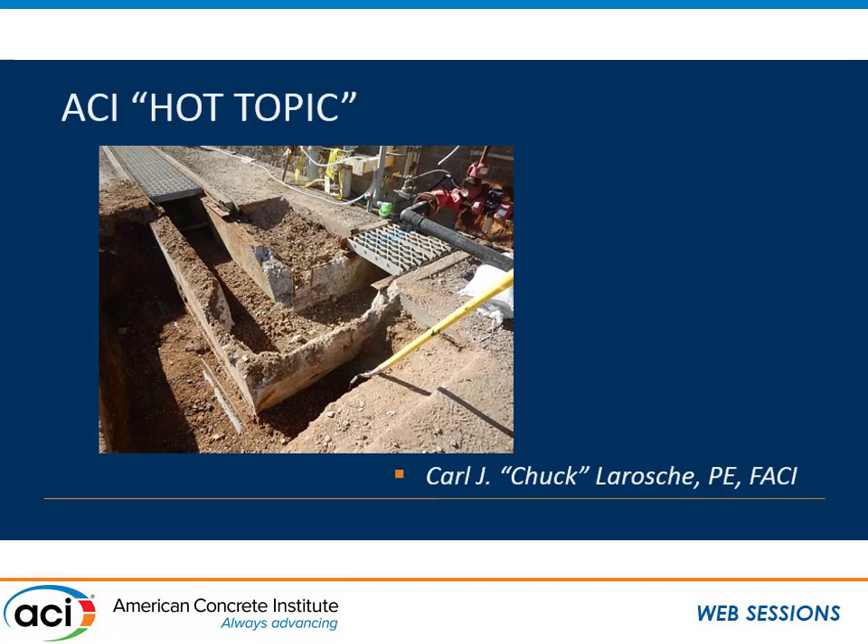All right, the hot topic, first out of the chute. Is it all on the contractors? I was kind of thinking more contractors would be here tonight, so hopefully we have a few. The failure of concrete repairs. So who are these guys presenting to you tonight, and who are they to judge the contractor?

But what I'd like to present to you, in all seriousness, is that one of the repair code's objectives is to create a level playing field. And in that way, we, the Institute, are going to improve contracting, and repair contractors are going to get a fair shake here. That's really what I wanted to talk to you about tonight.

I'm worried about little Dilbert. He's not like other kids. What do you mean? Yesterday I left him alone for a minute, and he disassembled the TV, our clock, and the stereo. That's perfectly normal, kids take things apart. Oh, the part that worries me is he used the components to build a ham radio set. Oh dear, is that bad? Normally I'd want to run an EEG on him, but the machine isn't working. It's worse than I feared. What is it? I'm afraid your son has the knack. The knack? It's a rare condition characterized by an extreme intuition about all things mechanical and electrical, and utter social ineptitude. Can he lead a normal life? No, he'll be an engineer.

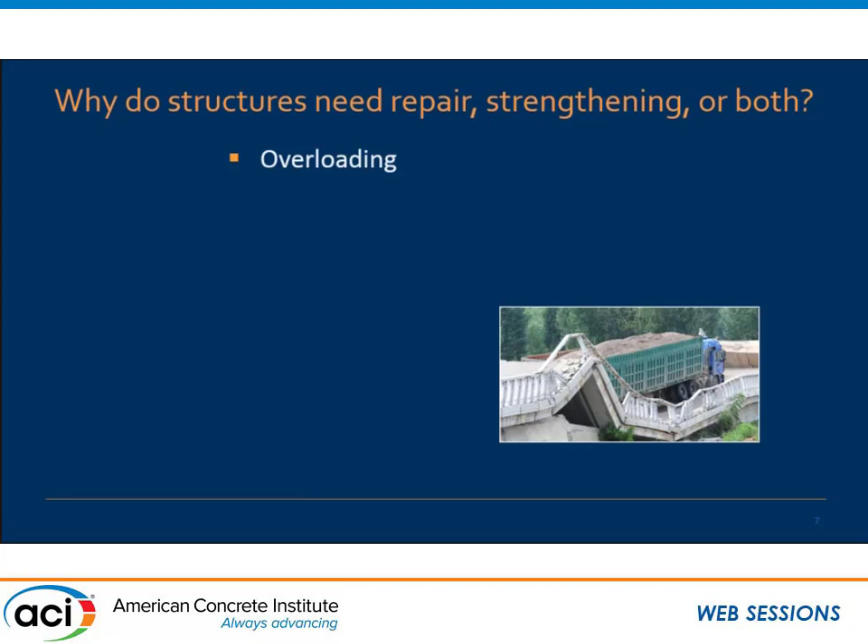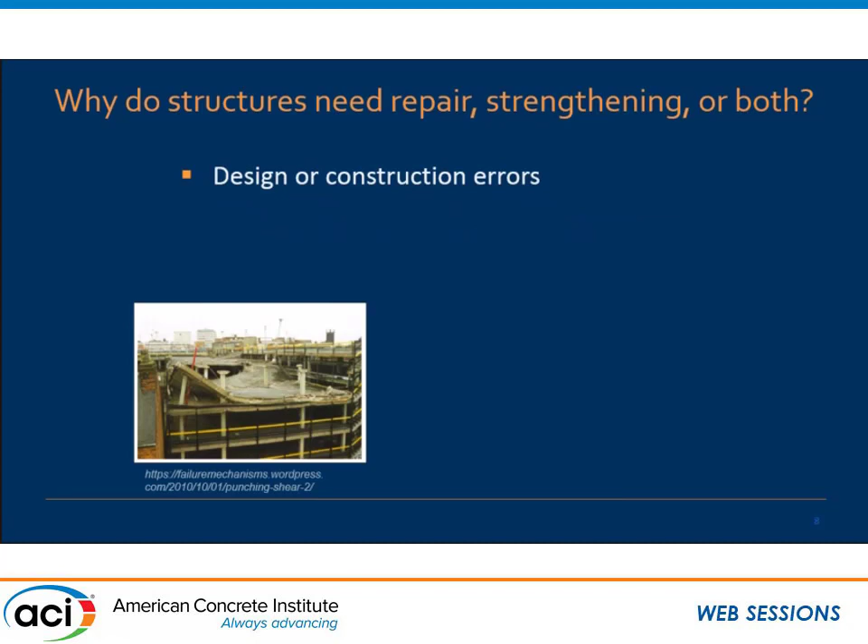Well, we've got overloading, deterioration, use of inappropriate materials, design or construction errors, undergoing expansion, accidental effects, environmental factors. But how big is it? That's 18 to 21 with a B - 18 to 21 billion. Kind of hard to wrap your head around that.

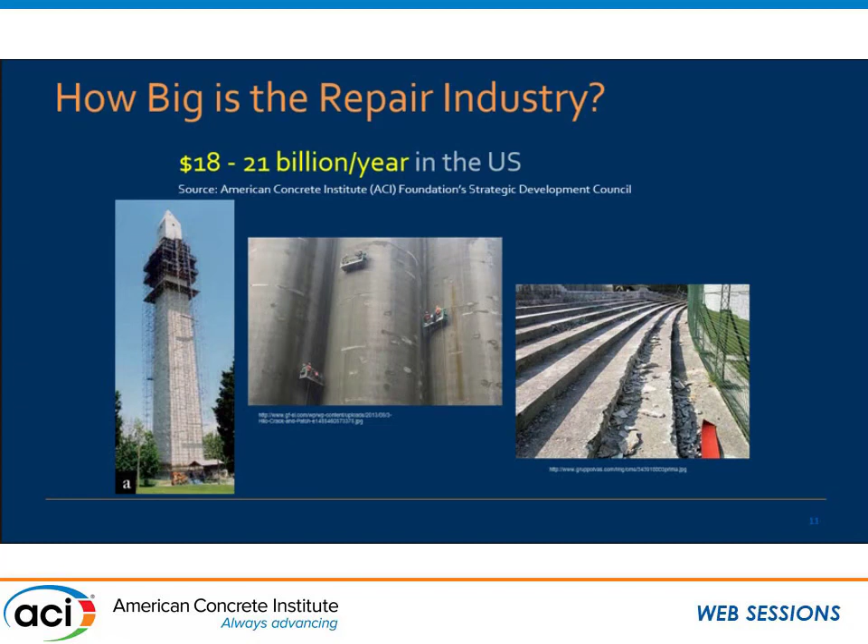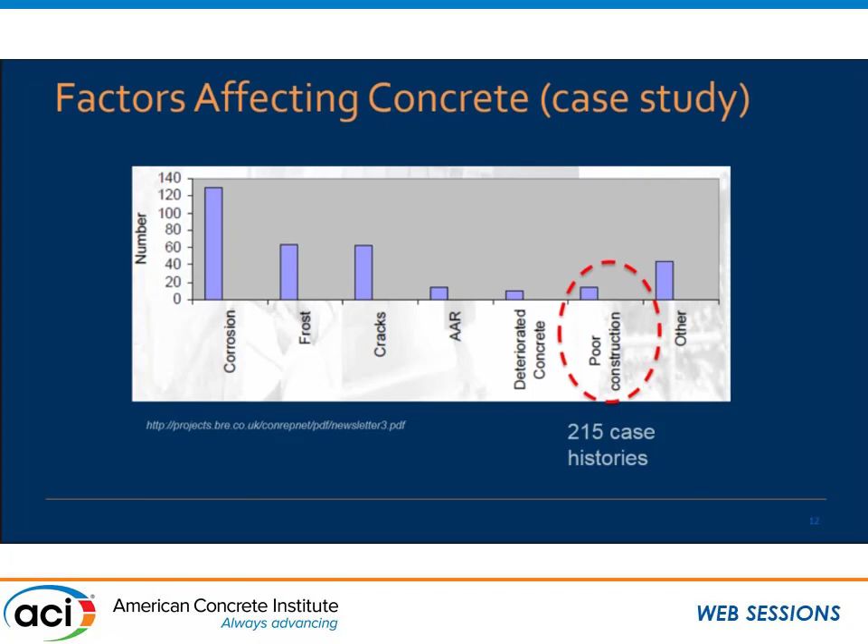But now we have these factors that affect concrete and also affect our repair. And we'll just take a closer look at construction, repair methodologies. But this is the issue, right?

0 to 5 years, 20% fail. I get to 11 to 25. Not exactly a track record for sustainability, right?

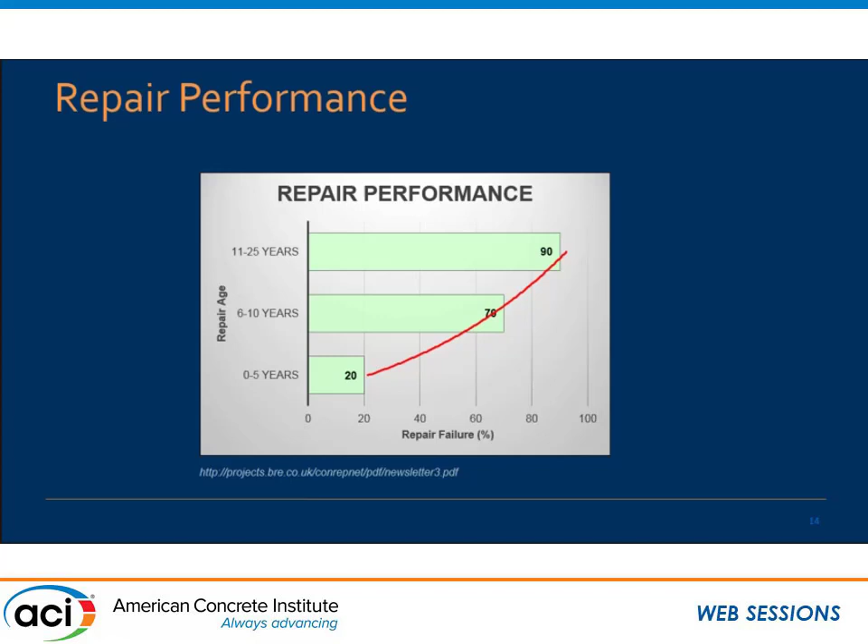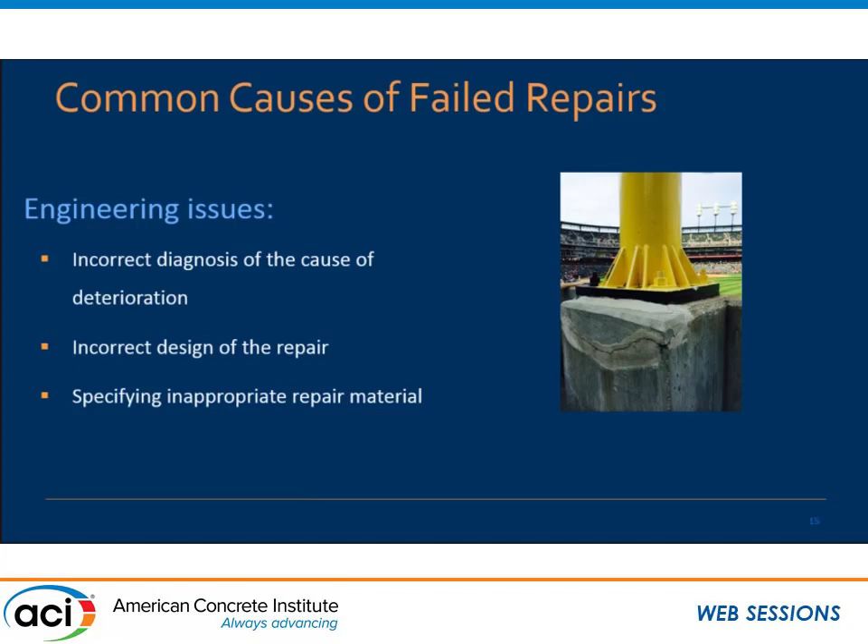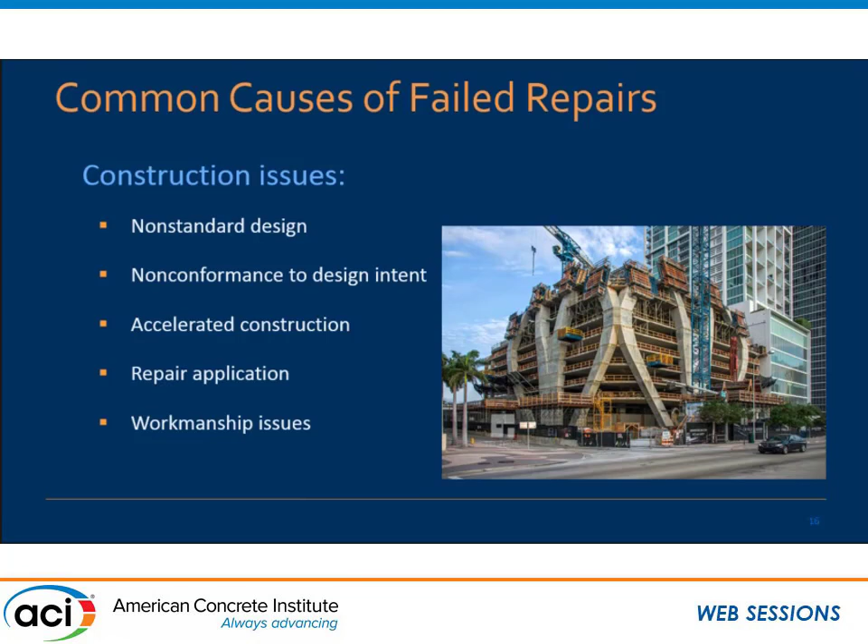So now I'm going to zoom in a little bit on workmanship issues and material quality. So is it really the contractor? Can we as an industry change the repair quality? That's kind of what we're trying to do, right? That's why we're here, that's why we have a hot topic tonight. Can we set the minimum standard that creates a level playing field? And if so, will the cream rise to the top?

So in trying to prepare for all this and having to compete with Dr. Marcotte, I had to stretch myself a little bit, and so I wanted to present two exact repairs designed by the same engineering firm, but with two completely different contractors, and I wanted to step back and look at it.

And the first one here is moving day. Now, I came across this project - how many of you have moved with your significant other? It's not a good experience, right? It's even worse when this happens.

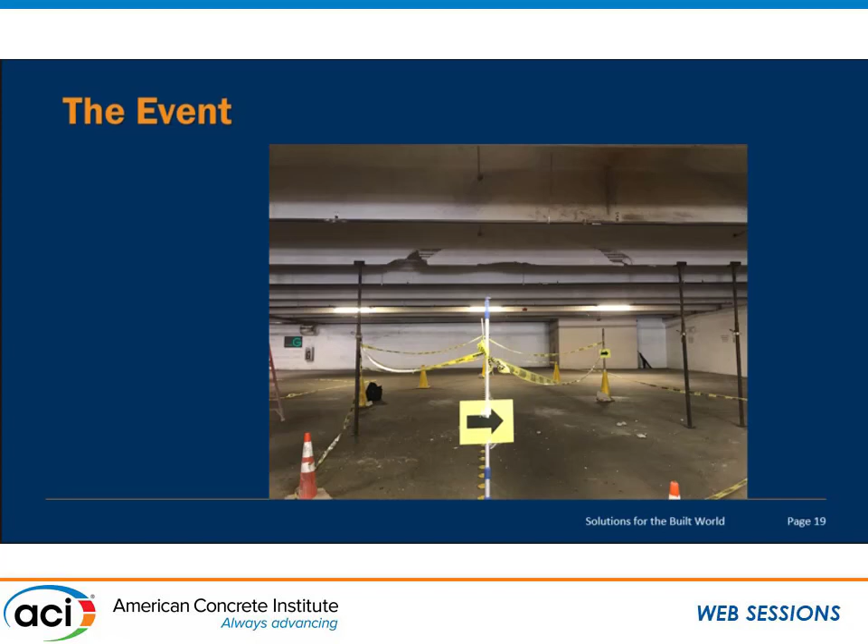And so I came upon this couple, and right as she was asking him if he certainly got the insurance, right? That would be a no. So this is my precast double T right after the event. And pretty easy to assess, right? Yep, you smacked it good. We're looking at this region.

But while this was going on, up in Dallas, we also had a rogue forklift driver. And he did that. You can just barely see it's a very similar breakout, right? Almost identical T's, almost identical situation.

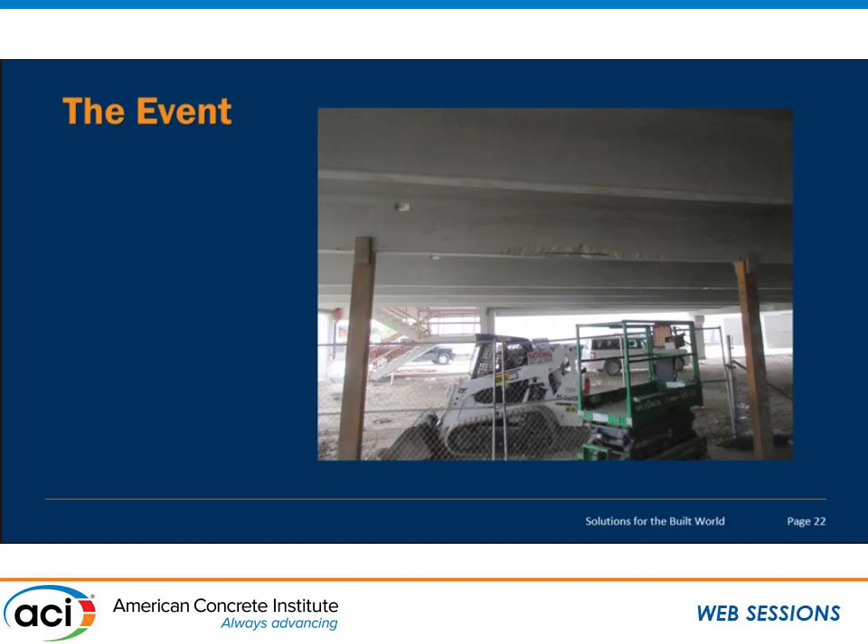So here's the engineer's repair approach. We're going to remove shoring, preload, saw cut. This is all right out of the ICRI playbook, right? Repair the concrete, place the material per the manufacturer's recommendations, leave the preload in place till the repair material meets minimum strength.

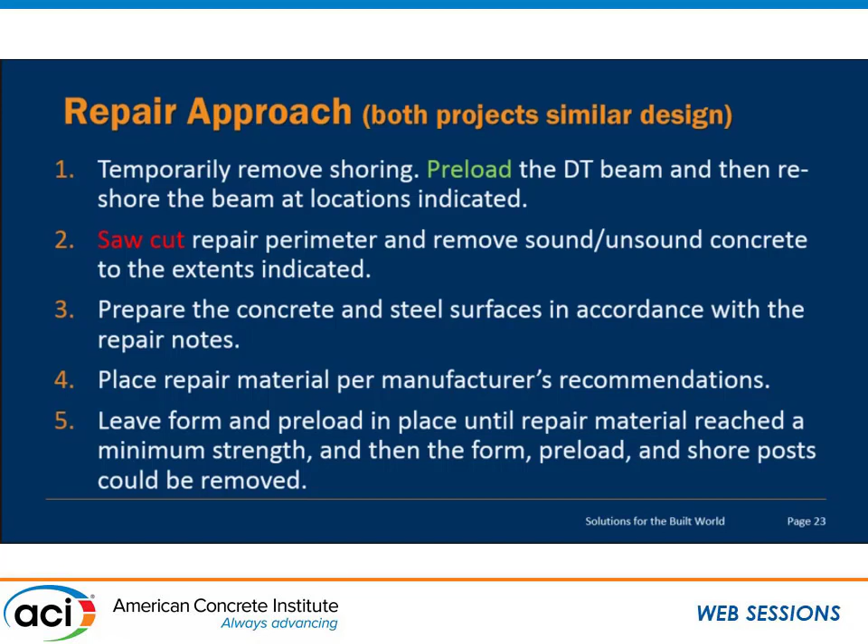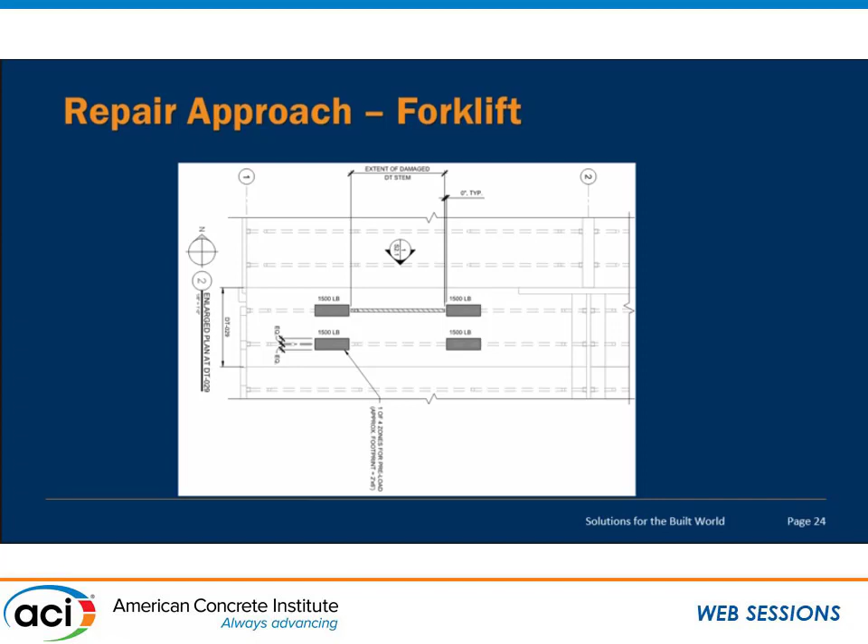Very straightforward. Here's a little bit of a shot of the forklift plans, and you can kind of see this is a plan view. They want to put some preload here. Here's the extent of the damage. Remember, it's the same engineering firm, so many of the variables are the same.

So here's kind of their repair approach. They're going to dial in here. They have it specified. In fact, what I will tell you is that moving day occurred slightly before forklift day. So the two engineers, same firm, collaborated, and moving day actually sent pretty much the drawing package and specs to forklift day.

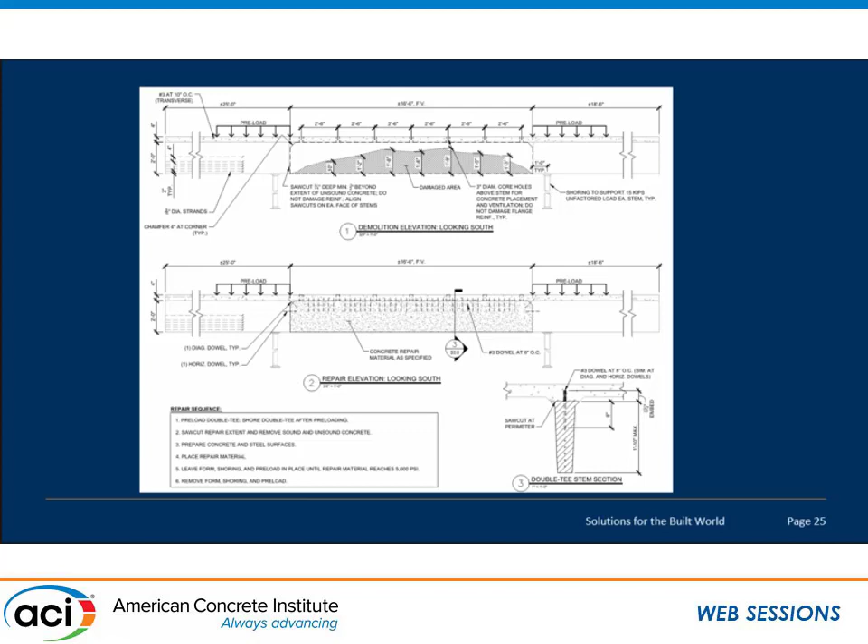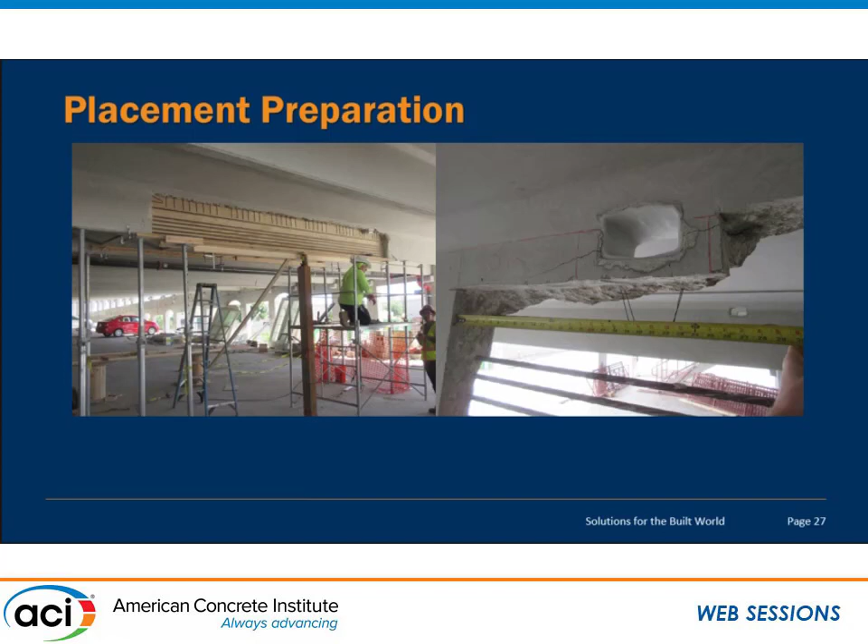Moving day, however, they took option B. They asked the engineer, who's good? They went and got the repair contractor recommended.

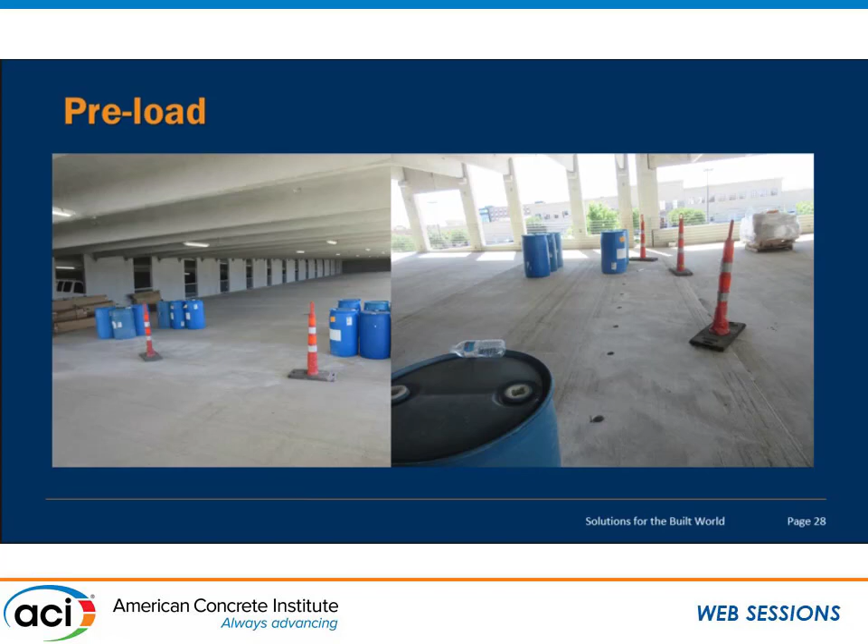So back to the forklift garage. Here's a little bit of preload. Here's the mixing material. I will gladly accept the check from Sika for displaying the product.

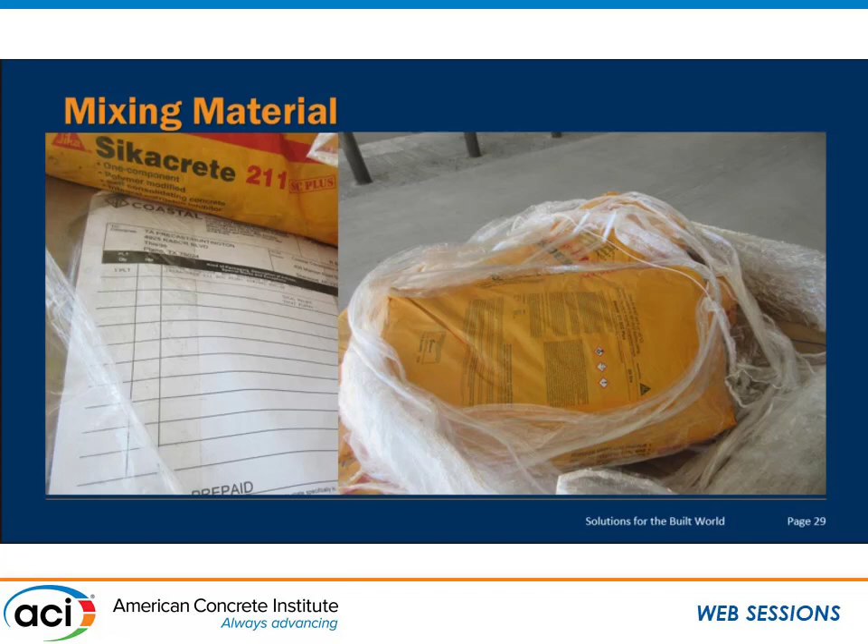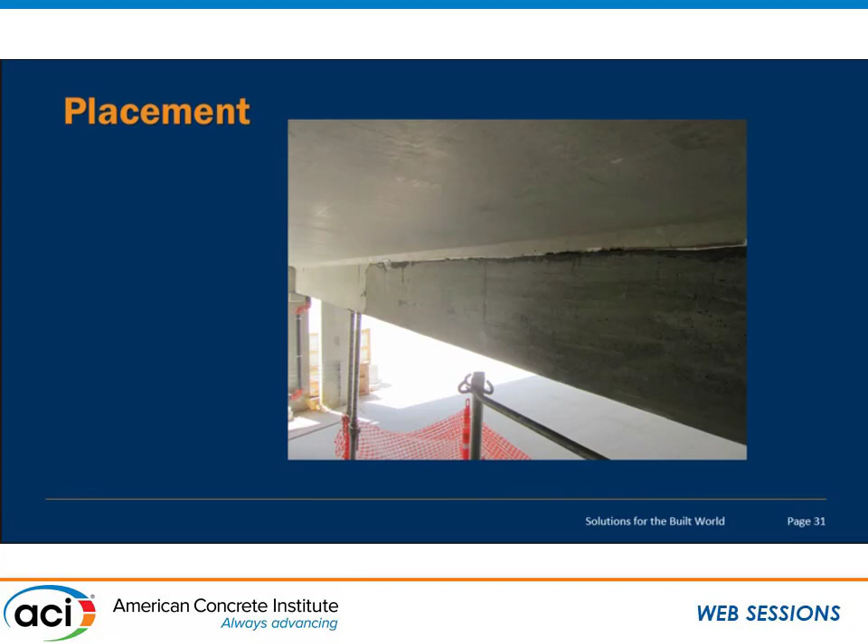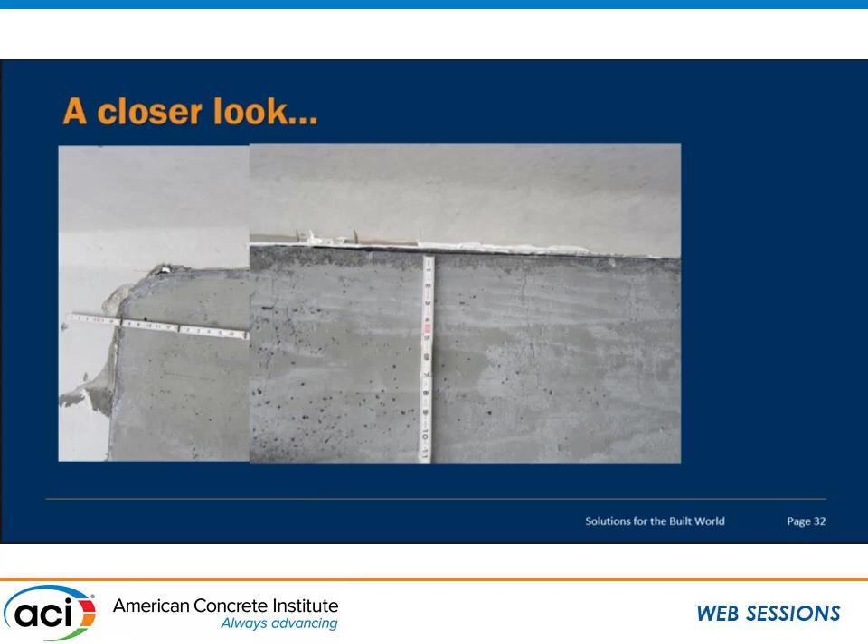Formwork, placement, but if we take a closer look at the placement, yeah, some of you start to see it, right? Not great consolidation. A little bit of a gap there. But it's easy, right? Anybody can do it.

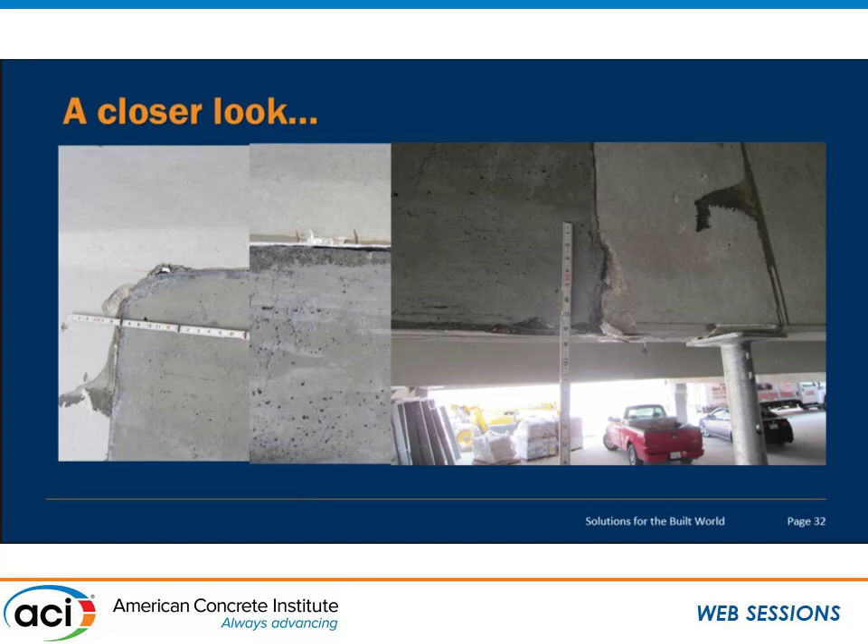In addition to this problem, let's take a look at the materials. There is an art to using prepackaged material, right? We've all heard about it, talked about it, and certainly the 562 repair code gives you a fair bit of guidance in this regard.

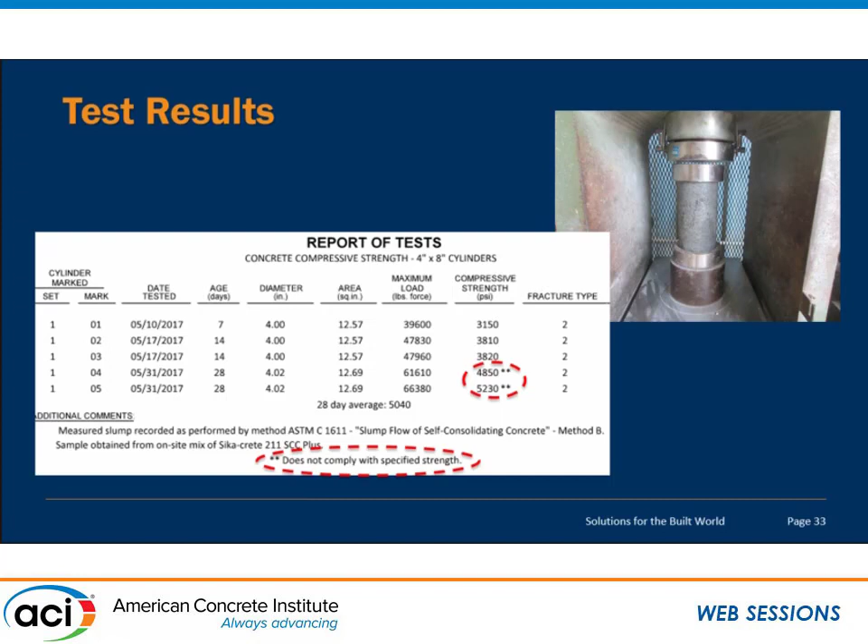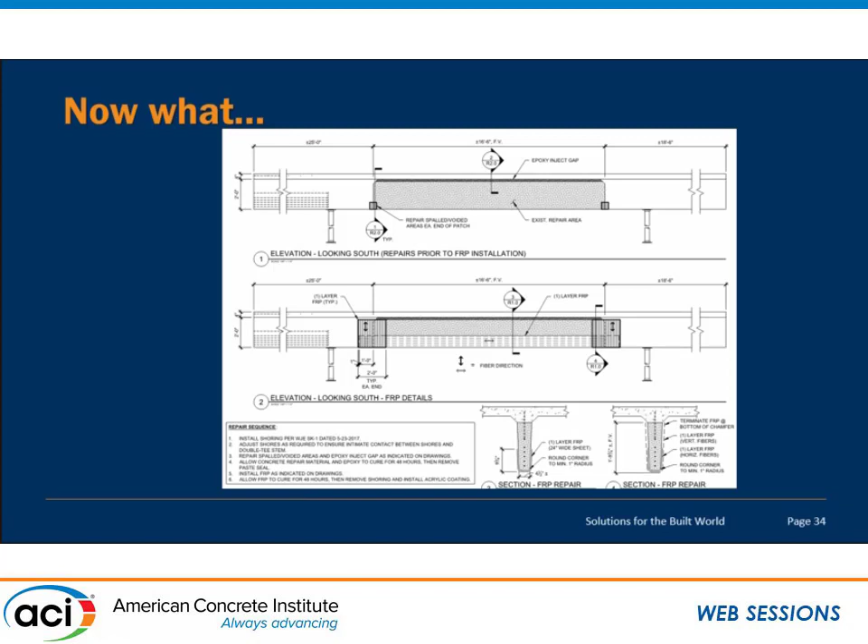Now we've got two issues. We don't meet strength, we've got all kinds of gaps. So now what? Well, now we come back with repair 2. So in order to fix repair 1, now we're in repair 2 with CFRP. So the question now is, do you think the two repairs were equal? Now we've doubled the repair cost. And that's what it looks like. Not exactly what the owner was hoping for.

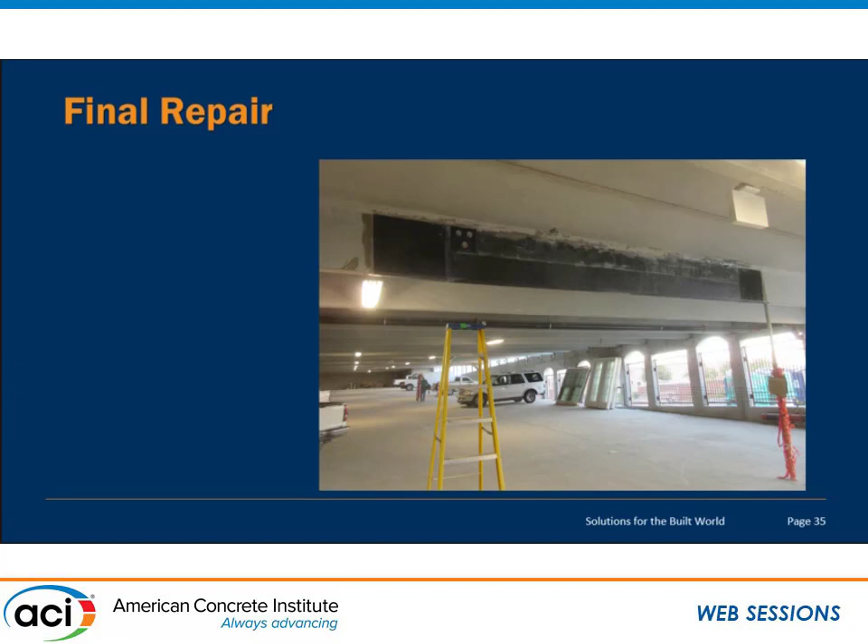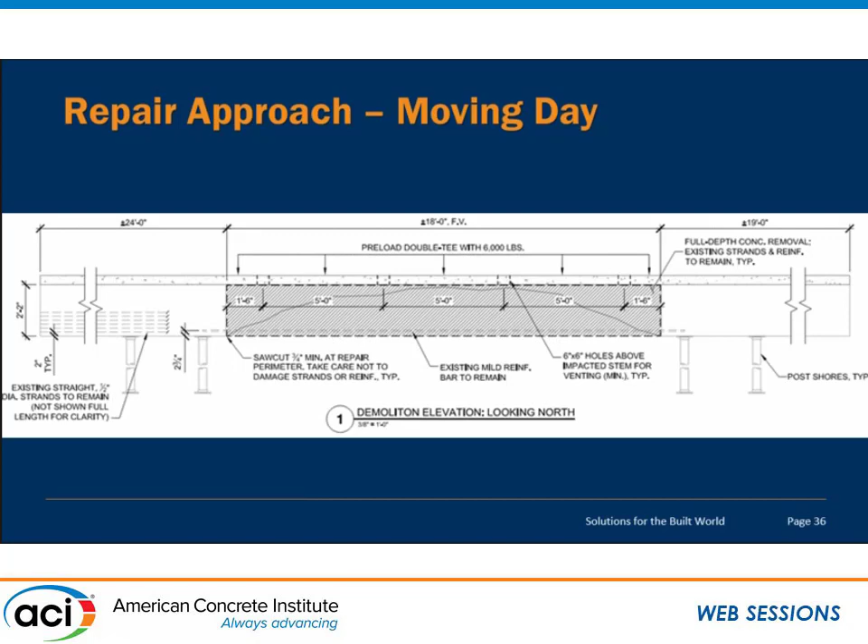But what about moving day? Very similar repair details, right? A little bit different. This engineer decided to put his preload right there, but it's a different weight, right? So they were just taking advantage of the weight they had.

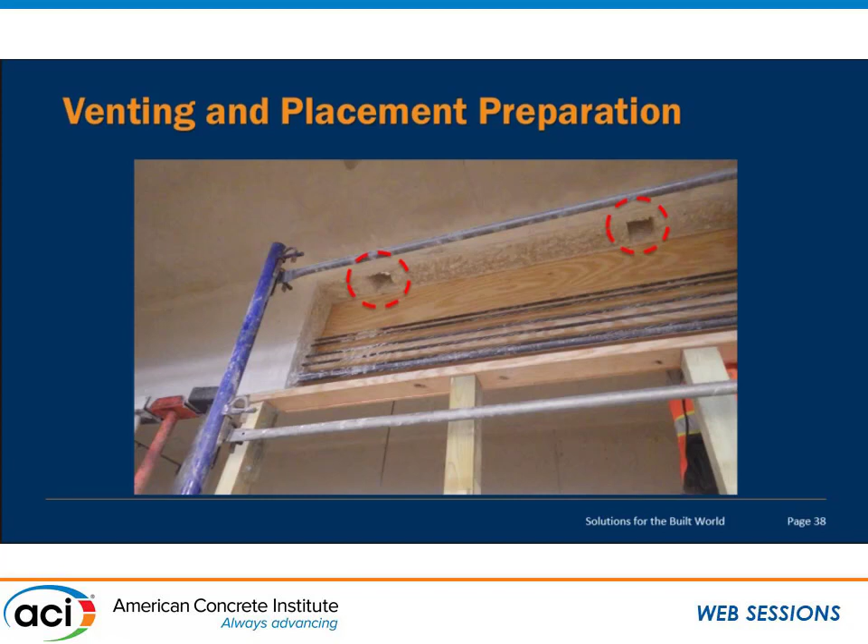Here's the demo, here's the prep. Now you start to see some interesting things. Notice the saw cut and the prep, right? Pretty dang nice looking repair. And he's thinking, well, I'm going to gravity feed this, but I got to figure out a way to get a little head pressure. This engineer didn't tell him this.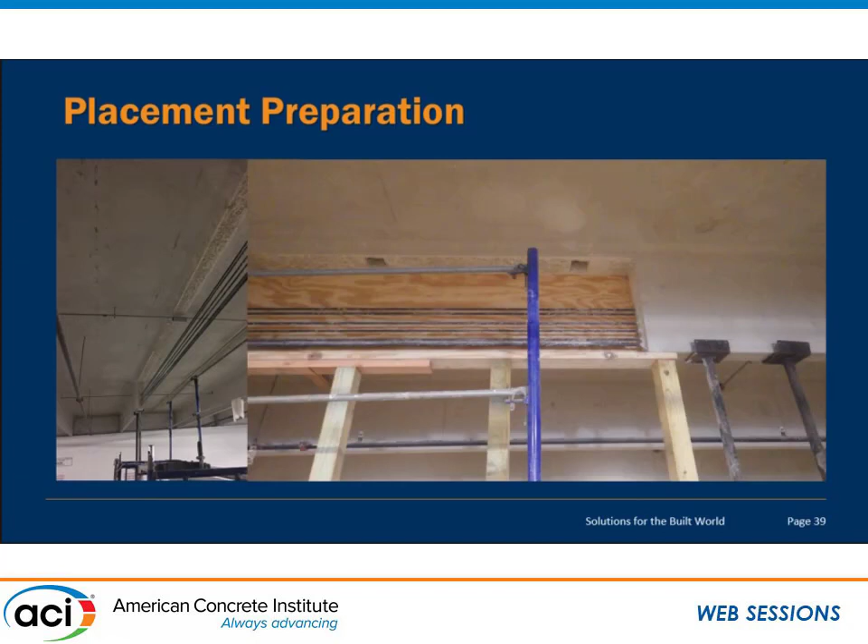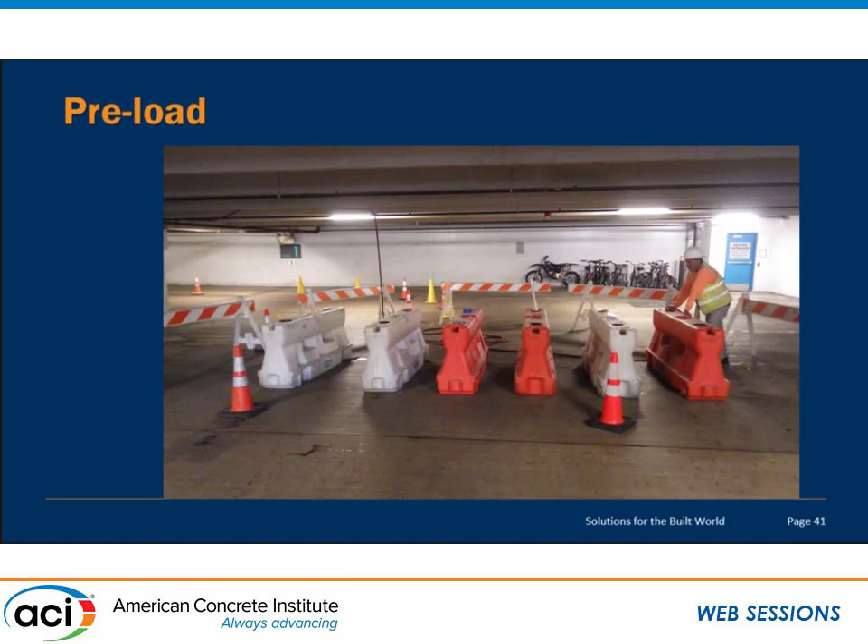So he's prepped here, he's ready to go. That's right when he closed it up. I think I got a slide of there's his preload. Pretty straightforward. Now carefully mixing his material, and this contractor chose not to do it by volume, but to do it by weight.

Water cement ratio, right? By weight. You're sure to get it right. So he has the exact spread he wants. That's just a little over 24 inches, if you can see my slide.

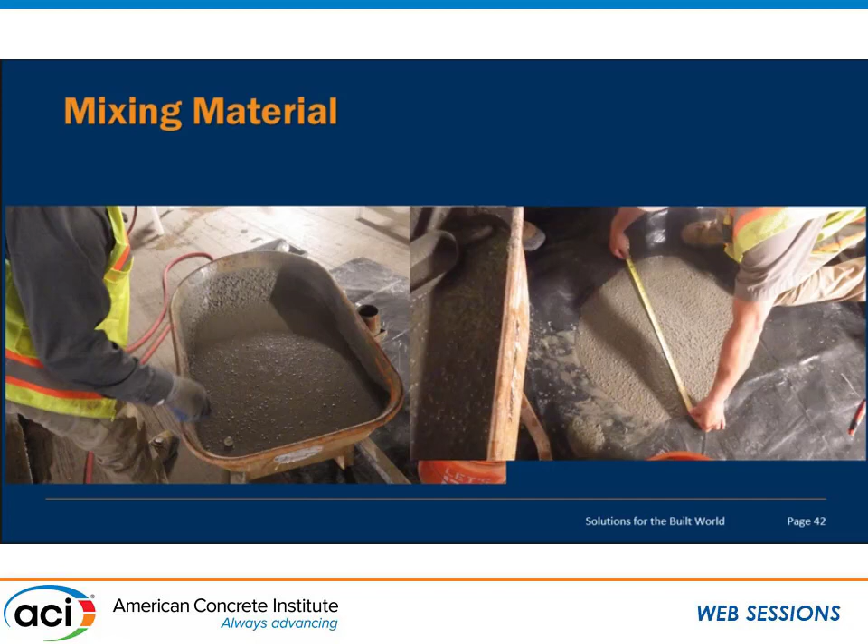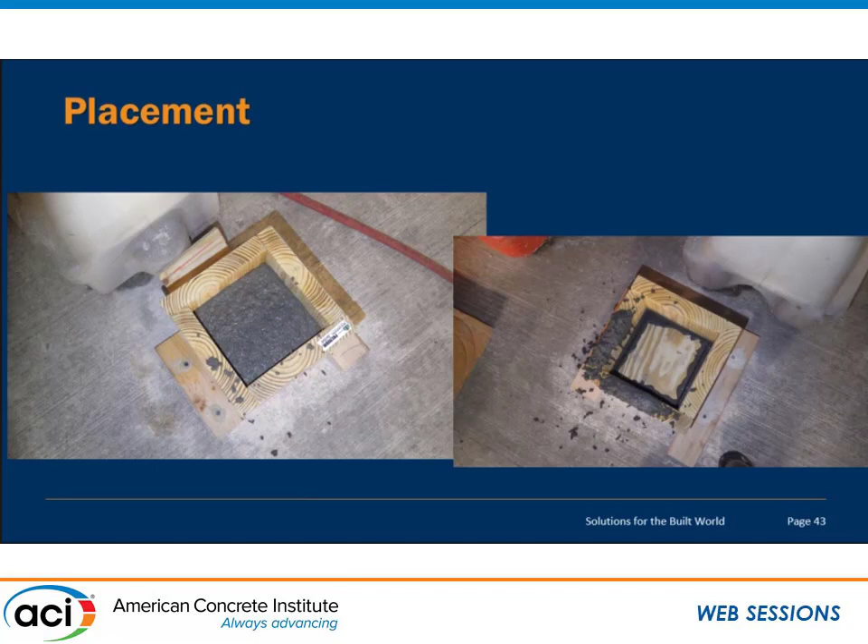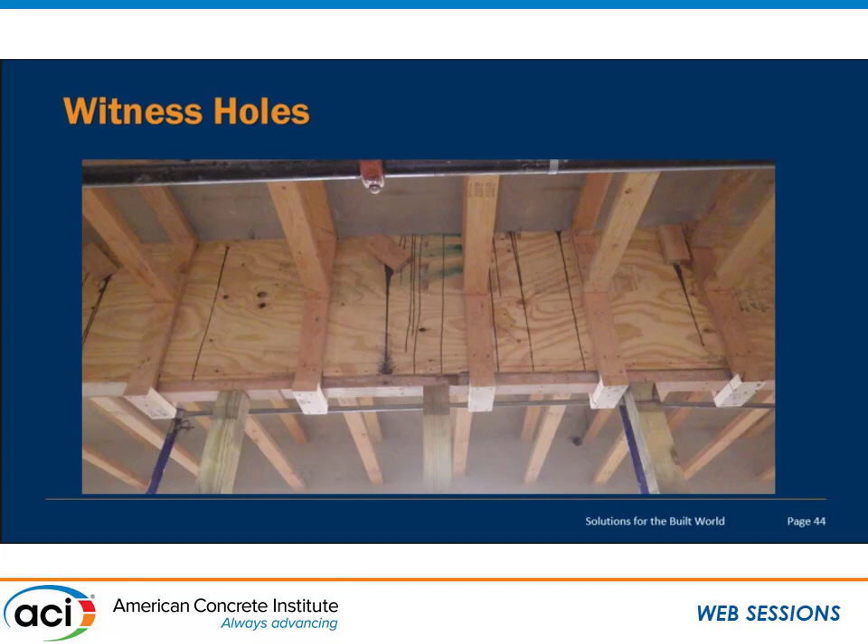And then here's his placement technique. You remember those vent holes? He has them raised so he gets a little head pressure, right? But he decides that's not quite good enough, so he cuts these blocks to fit and gets the handy barbells out, right? And a few witness holes just to make sure he's got it. Looks pretty good, doesn't it?

No CFRP there, all in one shot. So my question back to you is, creating a level playing field gives the qualified contractor a chance and some skin in the game.